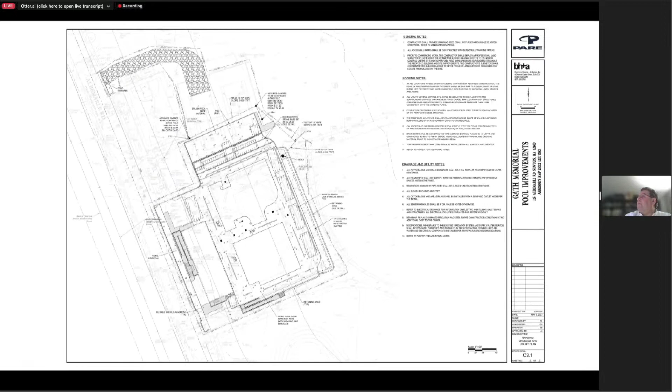This is basically the same drawing, a little bit different, without all the limits of work shown, just using a base drawing that we're working with.

One of the things we've been able to do at the request of a number of committees: in the area in front of the building, we are still adding the ramp and reworking the steps, but the large asphalt area in front of the building will now be a green space. They requested a lawn area here so that people waiting to go in or out of the pool, or just leaving, can have a lawn area.

We're placing bike racks on one end of the building to provide close access, and also providing bike storage for roughly 30 bicycles to accommodate anticipated capacity, as well as supporting bike storage and racks for the entire park. This entire area will be reconfigured with green space to soften the building up. We're also moving the garbage cans that sit next to the entrance over near the new areaway, which takes us to the basement levels.

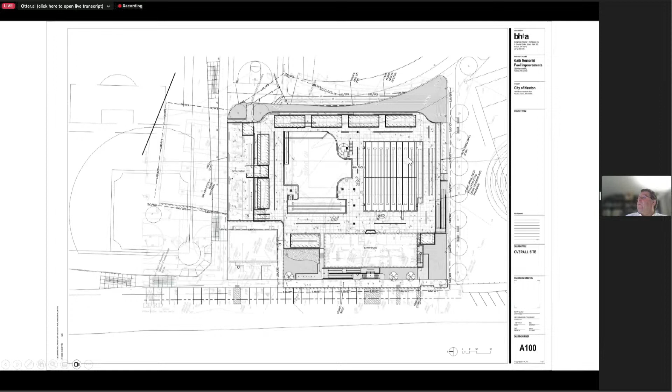We've continued to develop the decks and worked through a lot of the pool details, continuing to move forward. In the bathhouse, we have our ramp and the newly configured entrance. We've opened this up to provide better access, providing direct access from the lobby out to the pool decks, as well as having some lockers in here. That way, you no longer have to walk through the locker rooms or the office to get out to the pool.

The public has direct access. We have the gender neutral toilet and showering facility, and a gender neutral toilet directly off the lobby, in addition to the accessible facilities in both the men's and women's rooms. We've added doors to the women's shower stalls, and provided stalls with doors on the men's shower stalls. Right now it's just a wide open area.

The other big element we're doing here, instead of cleaning up the basement, is providing an areaway with flood-proof doors to get down to the lower level. Currently, all material is brought up to the deck and then dropped down. This provides direct access now for service and deliveries down into this area, as well as a second means of egress, which was lacking in the lower level.

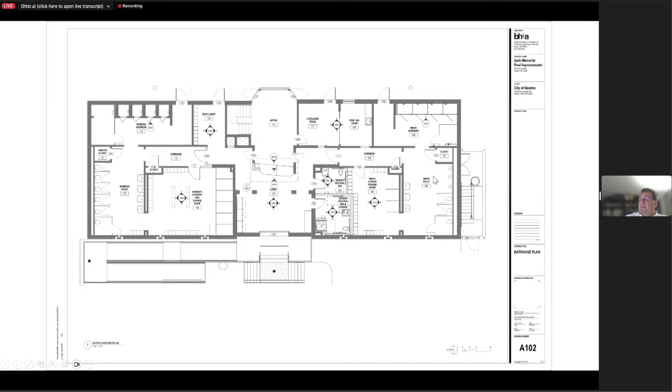The pools, again, we have our 8-lane lap pool, a large ramp, an accessible lift here, and shade structures around the perimeter. This is what we're calling the zero depth pool.

So from the deck you walk directly down to the water here, like a beach entrance. This will have railings to provide handicapped access, as well as an additional lift due to the perimeter of the pool. There are convenient stairs here for what we're calling water exercise, whether that's water walking or lap swimming. Programmatically, the city sees it used for resistance walking and exercise, and then there's a very generous recreational area along with a defined splashdown area for a new slide.

Other amenities here: we have rinse stations, outdoor showers with two heads, and foot showers as you exit the building, so you can rinse off without going back inside.

We have shade structures here set up for seating with some permanent benches behind. This can also be an ideal area for gear storage, or if people want to move a stroller or carriage out of the way, it's accessible to them.

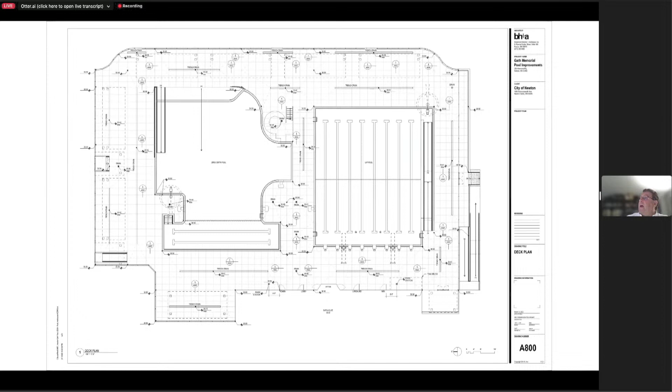Again, just more details. This is a larger detail of the pool, the 8 lanes. The lap pool is oriented slightly differently because I have to fit larger drawings onto smaller sheets.

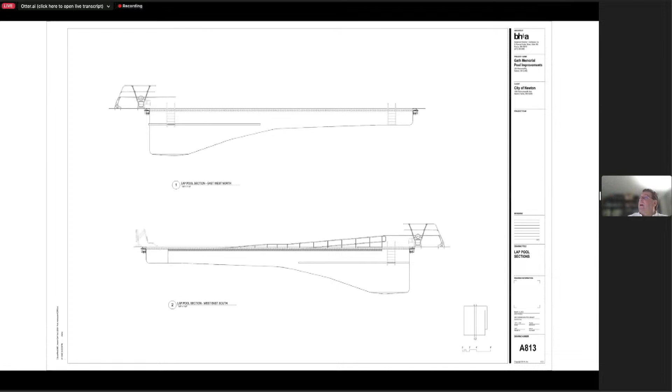The one thing I wanted to point out is that we are now showing the toe space, 2 feet off the bottom, which I wanted for structural reasons. So from roughly 5 feet of water all the way through the deep end of the pool, there's a 4-inch by 4-inch toe space, 4 feet below the water line. An individual can grab onto the gutter, put their toe in this space, and support themselves without just hanging off the side. That'll go on both sides of the pool, as well as beneath the racing lines along this area.

These will be tile racing lines for the 8 starting blocks here, and these are the positions for the return on the kick turn end of the swimming pool.

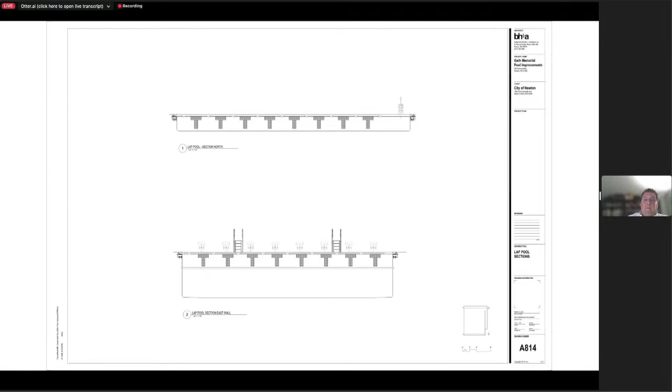One element we had to change: we lost the little step we had in the splash pad. We needed to change the grade of the spray deck to accommodate our flood storage capacity. The deck generally remains the same relative to layout and fixtures, fully and universally accessible for all. We've received feedback from Parks and Recreation, who received feedback from the Friends group, and we're incorporating changes where we can, being conscious of the activity, the age of users, and the water saving demands of that.

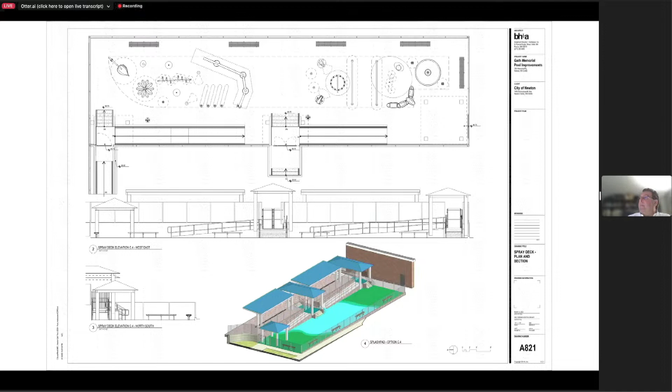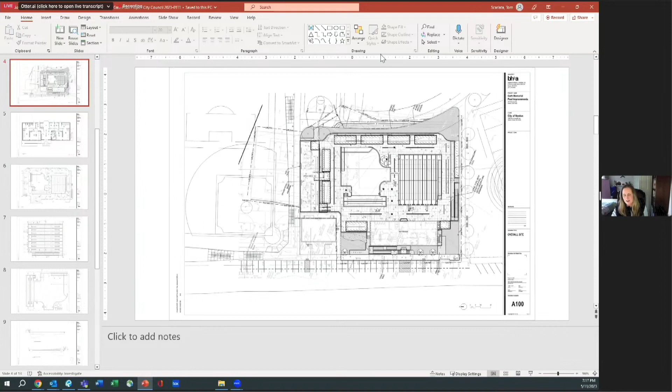Thank you very much, I'll make a motion for that presentation. Chair Leary, could I also add, we have our Friends of Albemarle group here watching tonight, and I wanted to mention them as well. They've been a great partner for this project, as well as the Albemarle Park project we've been working on alongside this one. Yes, they've been great partners. We've been hearing from them, and I know they've been integral to the project.

If you could, Tom, stop sharing your screen, I'd get a better view. No problem, there you go. Thank you very much, that way I can see a little bit better. So I'm going to take questions from the committee, and this is also a public hearing, so I will take public comment as well.

So I see Councillor Kelly has her hand up. Oh, thank you, Chair Leary. I can attest to the many, many meetings and changes and adaptations and tweaks and refinements this project has gone through, and I really appreciate that, so much like seeing this almost finished product. I have one question - I just happened to notice tonight, I hadn't before, that it looks like the men's shower stalls are much larger than the women's in the locker rooms. Is that true, or was that just a funny effect?

No, I think it's a funny effect on the drawing. There's a number of fixtures on the side that I think she drew just to the current spacing. We're actually adding an extra shower piece into it, so no, they're all roughly 3 by 3 - it's all equal, just tight and nippy. Thank you, Tom.

And I may have missed it in your talk tonight - these are really minor details, truly just questions. Did you show a place where there is stroller storage or parking, around the periphery or on the pool deck? Where was that again? Currently, where the wading pool is, that area tucks in next to the building, and that is staying as part of the pool deck. It's going to be lower so that the pool decks are flush with the floor of the bathhouse, so everything is accessible.

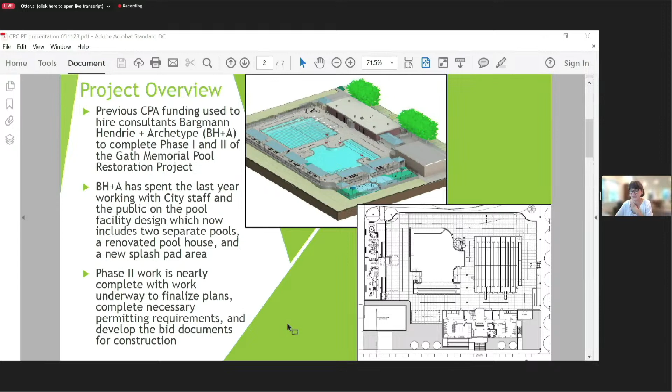I think the next slide—you've just heard that the pool now includes two separate pools, the new splash pad, the renovated bathhouse, all the mechanical equipment and more. In our meetings with the CPC, the committee asked a lot of questions about the design, about accessibility. Sustainability was a big issue for us, and also how the pool fit into other plans. Next slide.

Sorry about my dog. The CPC voted unanimously to recommend the funding for the project at $5.8 million. As you saw in the previous presentation, this is leveraged with ARPA funds, state earmark, and staff time. We recommend bonding the full amount over a span of 30 years, which we are assured is less than the expected lifespan of the pool.

Before we made this decision, we consulted with Jonathan Yeo, the CFO of the city, really trying to understand our options. We know the pool is more amenable to bonding than some aspects of the field renovations, which we've also been reviewing simultaneously. So we thought very carefully about the projects together to ensure we could be fiscally responsible, and we think the approach here is to bond the full amount.

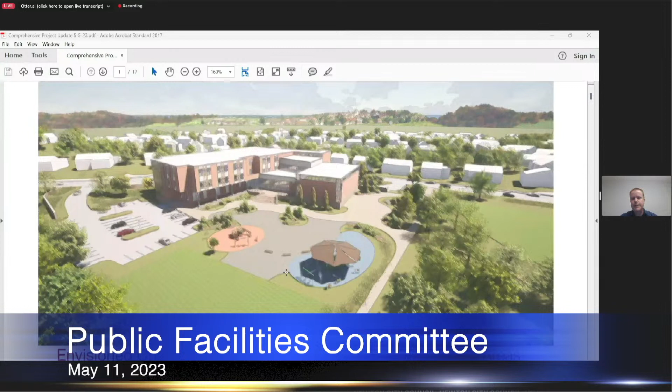So the Countryside School, this is in partnership with the Massachusetts School Building Authority, MSBA. Exciting project. We are knee-deep in the feasibility phase and currently working with the facilities subcommittee at MSBA to review the latest plans. The decision has been made to go new construction. The decision has been made to site the building in the northeast corner of the lot, the highest portion of the lot, for a couple of really good reasons. The site plan, although we're not seeking site plan approval anytime soon, is coming along quite nicely.

We've got a lot of good feedback from the design review committee and the community already. We are exploring the possibility of keeping the Countryside School students and staff in their facility on site while we construct this new building, because they physically don't interfere with one another. But we've got a lot of work left to do.

The staff, and certainly Principal Herlihy and the parents so far, have expressed strong support for that. But we need to prove it out. We need to make sure we can manage the parking during construction, manage dust and noise control, and manage access to the playgrounds and all of the construction phasing that comes with that. But from a high level, it looks pretty doable.

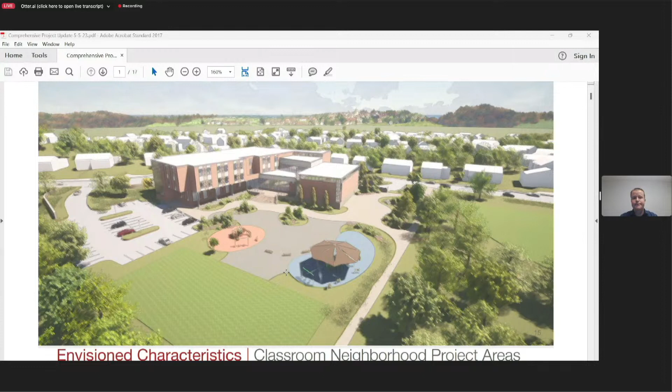But we've got more work to do. We need to work with a lot of stakeholders before we get too far down that road.

Overall, the educational program has been set. It looks great, there are no surprises here. It's going to be a school similar in size to the Angier School, with a design enrollment of 465. MSBA has agreed to that.

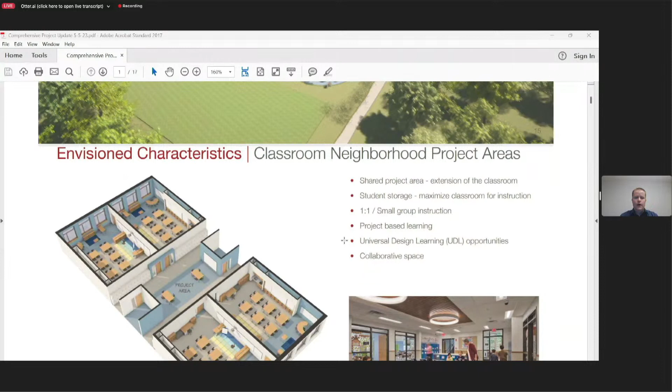What we're currently working with MSBA on is reviewing the design and siting of the building, and ultimately working towards a project funding agreement, which we're hoping to secure this summer. That will allow us to continue moving forward through the MSBA pipeline, move into schematic design, and start working towards site plan approval. We've got a lot of work to do before we get there, but that would be the next major milestone.

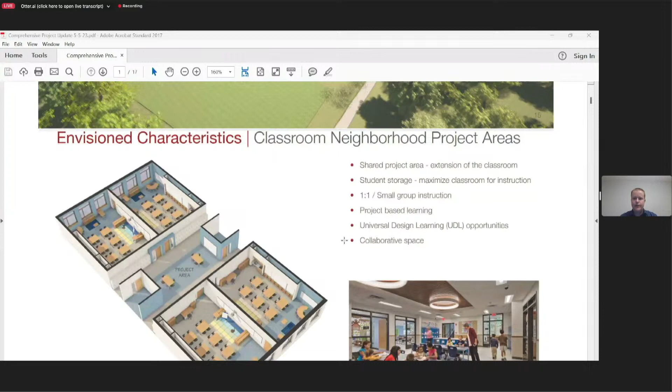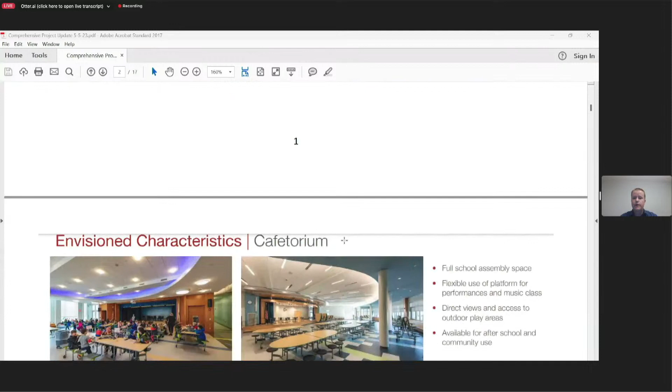We've had a lot of great community meetings for folks that have joined us. I know we have several councilors on the call tonight who are on our building committees. They've been well attended. I've now sent multiple batches of certified letters to the community — that was one of our lessons learned, to engage people with certified mailings early on.

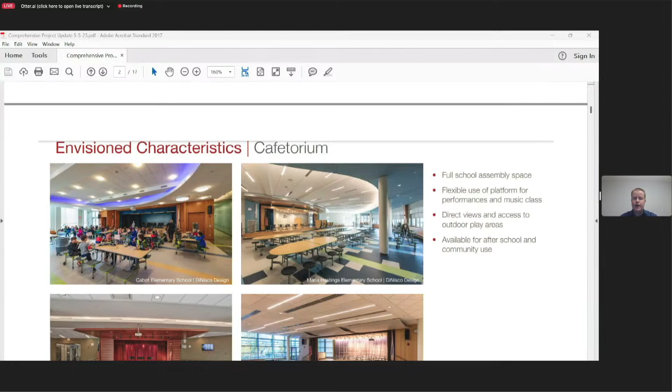And then again, obviously as required for site plan approval. But I did another round of these after the override, because the override got a lot of people's attention, and I wanted to make sure we took advantage of that so folks had an opportunity to come and get engaged on the project.

Right now we have about 200 people who actively follow the Countryside School project and come to our meetings, so we're in good shape there.

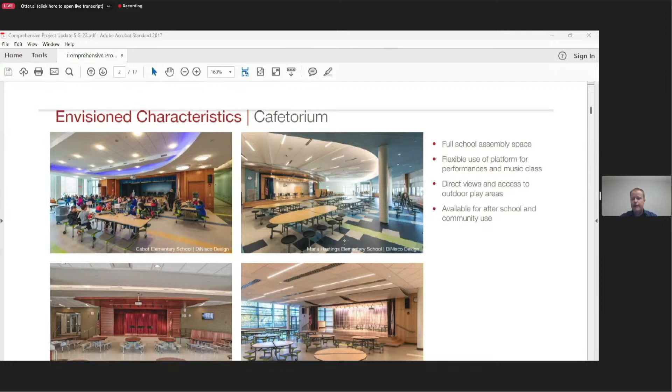What I have found is that because we have so much going on, a lot of people are watching these meetings after the fact and then emailing with questions or comments. It allows them to do it at their leisure, and they can fast forward through the parts of the meeting they may not be interested in.

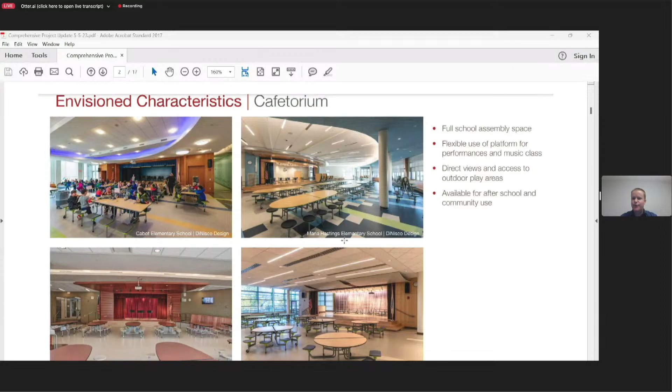We've already had a couple visioning sessions with the staff. We've stayed very connected with the Countryside School staff and Beth. They've been awesome in helping to set the stage — no pun intended, as we look at stages — for the future of the Countryside School. Lots of great ideas coming from them.

We had our first meeting with the Conservation Commission. That went extremely well. Obviously we have a lot of work to do because they're right in our backyard, literally.

We gave an update to the Public Facilities Committee, and that went extremely well additionally. And our Countryside School Building Committee voted unanimously to submit the preferred schematic report to MSBA.

All of those files are on our project webpage. We've posted everything. I try to send these out to the project listserv following every meeting so that people, whether they made the meeting or not, have access to all of the materials with a brief explanation of each meeting.

That is the high level on the Countryside School project. We are still on track to break ground in 2025 and complete the project in 2027. It's still very early, so there might be opportunities to accelerate that, but time will tell.

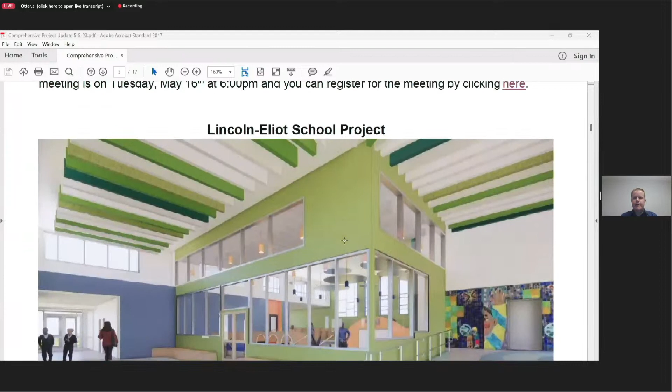The Lincoln-Eliot School project — we are now in the final phase. We're in construction documents, and we're working hard with our design review committee to move this project along. Our program is extremely well established at this point.

This is a view of the lobby coming in from the Jackson Road side of the building. You're looking into the library there, starting to play around with the introduction of some vibrant colors and developing our color pattern for the school, working with the staff on this as well, Maura Morse and her team.

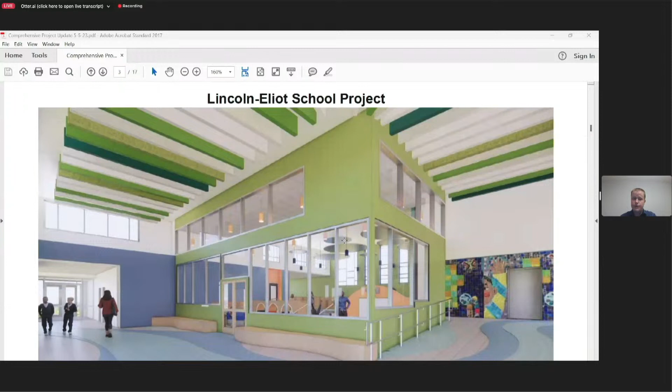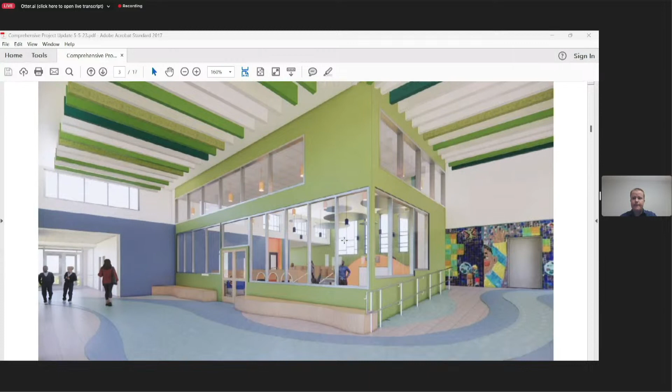We're using a lot of 3D modeling to fly through and help make sure we're nailing down sight lines, form, and function. The staff and the community have been extremely excited about the project, especially as of late when it really starts to feel real.

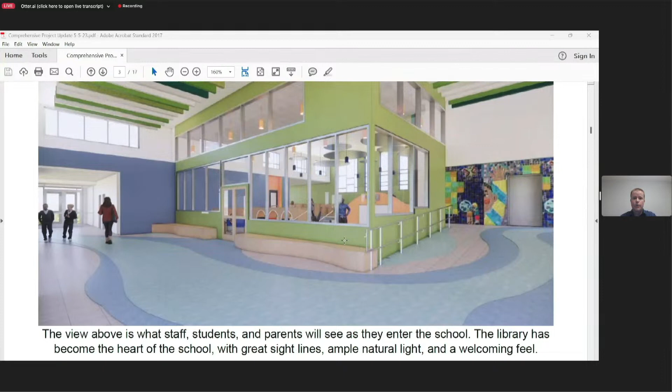We are looking to bid this project towards the end of the summer. We're going to start construction this fall. We are still on track to be completed with the project in the summer of 2025.

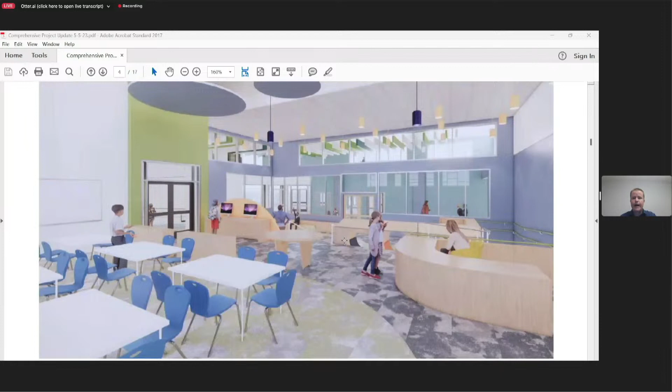We're also starting to work with the design review committee. As you can see, we're looking at a lot of different options on the addition, looking at how we break up the massing.

For folks that have been around and been through these a few times, the gym is always the big addition, and that's the area we spend a lot of time trying to make sure we're scaling down as much as possible.

We have a lot of direct abutters who are directly engaged in this project frequently, which is awesome. So we've been able to incorporate a lot of their suggestions as we move forward.

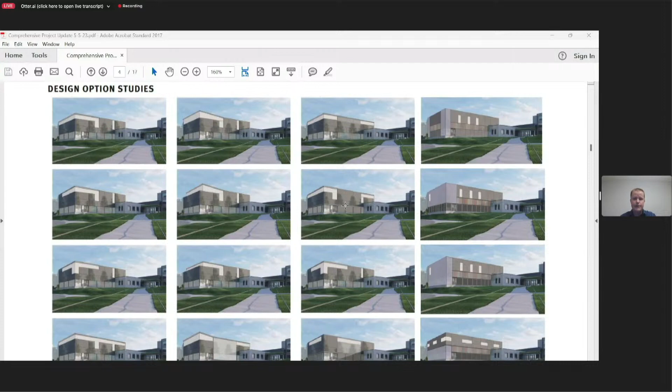So that's the Lincoln Eliot project. We're moving right along and in great shape over there.

Our next one is in, I think, three weeks. So we'll be working with Mark and his team over there. Extremely excited to be able to re-engage with them.

This is a very passionate teacher base, so it's going to be really cool to be able to round things out with a visioning session and really get cranking again on feasibility.

At the same time, we just presented the space program, the space summary, which identifies the design enrollment of 396 to 414.

That number may sound familiar for our Ward 1 councilors - that is the same design enrollment that we used for the Lincoln Eliot School project. The Franklin School enrollment, current enrollment, and certainly the projected enrollment suggest that is a very reasonable number.

But just like Lincoln Eliot, in the design process, we will include in the design a future siting of additional classrooms should they be needed. All core spaces will be sized to support a full 465 student population so that the building can grow should it need to. So the school building committee endorsed that. We're in good shape there.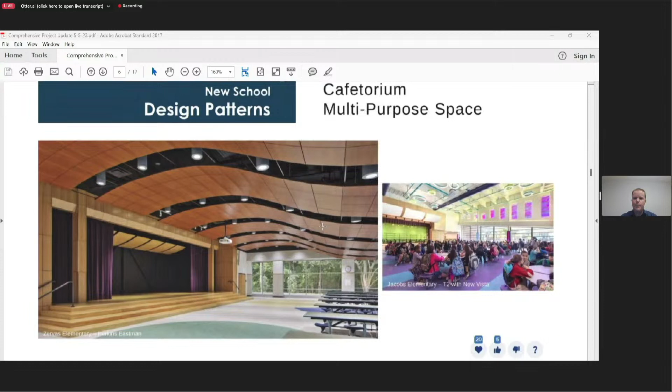Same thing - we will start to evaluate addition, renovation, and new construction options, varying site test fits, and we will approach it the same way with our criteria and our matrix that you see so often. We'll be working with the community to weigh the opportunities and challenges associated with each of those.

Ultimately, working towards a decision, I would say, on that front sometime this fall, and then working towards site plan approval thereafter.

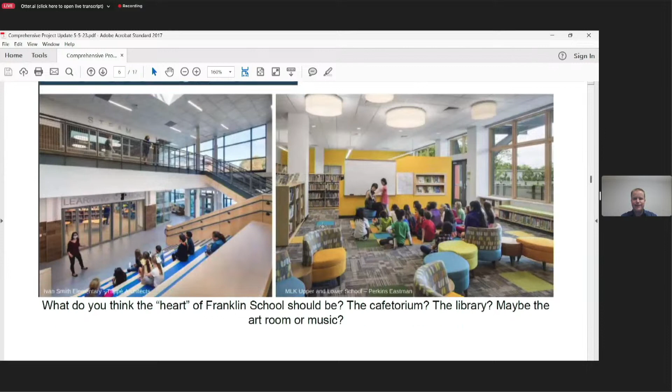These are some of the images that we use when we're working on visioning with the staff, but they're, of course, exciting to get people thinking about what could be there.

So we've covered all of this. I'd like to thank HMFH Architects, our design team. We are also in the process of working with the designer selection committee to interview and onboard our owner's project manager and ultimately select them.

We hope to have them on board by the end of June, which will time out perfectly, meaning the school committee gets the design enrollment and space program established, we get our OPM on board, it all hits at the same time, and then we roll right into the summer and get to work.

We are still anticipating that this project would be able to start in 2025 and complete in 2027. That is assuming, as we've spoken about before, that Countryside doesn't need the swing space and Franklin doesn't need the swing space at the same time.

As I mentioned before, it looks like there's an opportunity to do Countryside on site. If that's the case, Franklin can use the swing space, should it be an add reno or new construction. Or if Countryside needs the swing space and Franklin does new construction in a different location on the site, it could also stay in its current facility while we build a new facility.

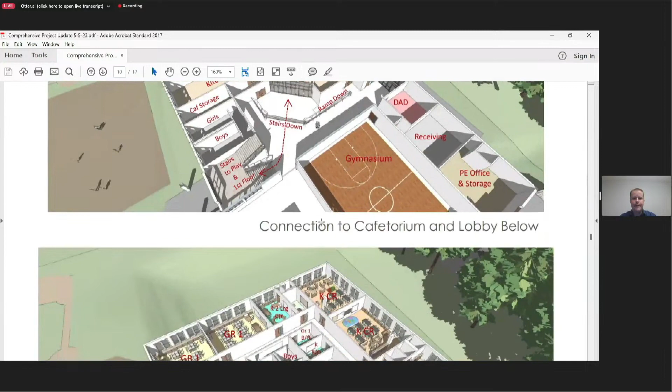The Newton Center for Active Living project has a very similar timeline to the Lincoln-Eliot School project. We are now in construction documents, final phase, working on fixtures, furniture, furnishings, and equipment. We're starting to look at color patterns because this looks a little sterile right now.

So we'll be introducing all of our paint colors and finish colors in the coming weeks. We are pre-qualifying contractors, just to give you a sense of how close we are. Big picture, I think we're going to be looking to begin construction probably in September. We'll be bidding over the summer and then starting work in September.

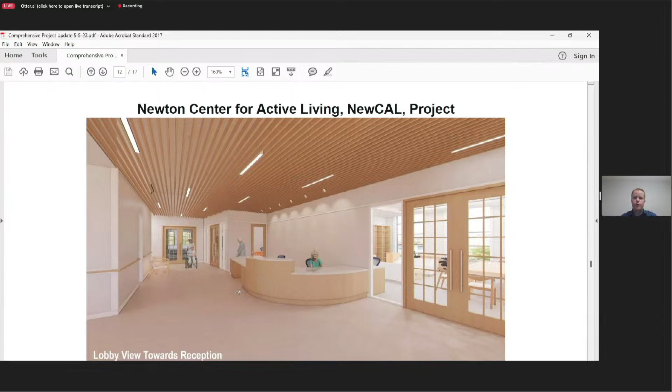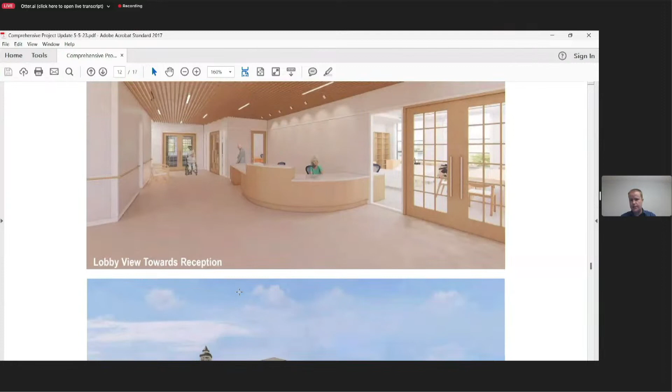Our goal is to finish in the summer or fall of 2024. The inside of the building—the floor plans have not changed, but we've continued to refine elements. And the outside of the building is almost completely unchanged, so we're in good shape there.

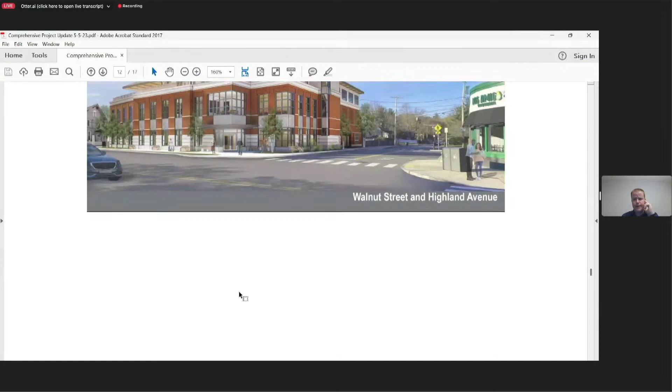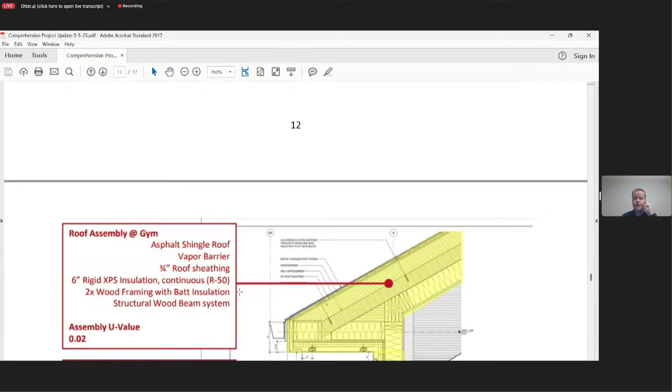The design review committee just last night met to review the final, or 90%, construction documents, and they voted to allow the project to go out to bid, confirming it meets the program and is ready to do so, obviously with comments, which is pretty typical. That is our last major hurdle before we put the project out to bid. A huge shout out to the design review committee because we've been keeping them extremely busy.

The Gath Pool project should be fresh in your minds, but it's been an exciting one. I think the design review committee really liked working on this too. It's a different project—quite frankly we do a lot of schools lately, so it was neat to do something a little different. This really is a fun project, and I'm really looking forward to what this is going to do for the community.

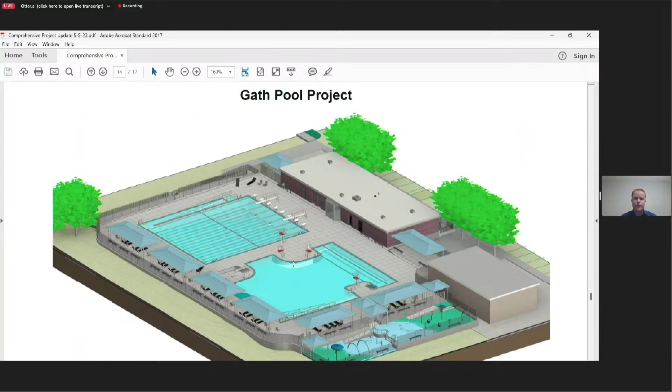A huge thank you to BH+A, they've done yeoman's work on this. Tom Scarlotta, for folks that don't know him, is a humble guy, but he's the premier pool designer in the Northeast. This is what he does—he designs pools, it's basically all he does, so he knows the stuff extremely well.

And the Ward and Underwood initiative—we just kicked this off as well. This initiative is being led by Newton Public Schools, but the Public Buildings Department is assisting from a process standpoint. We used the Designer Selection Committee to evaluate proposals and ultimately selected Perkins Eastman as a consultant to support Newton Public Schools for their enrollment and facility study.

Perkins Eastman may sound familiar—they are the designer that did the Zervas School. They have a great track record on projects like this and a great temperament for it as well, so we're really looking forward to that. We've done a few meetings already, and all of that information is posted on the Newton Public Schools website. This is an exciting project to help determine the future for the Ward and Underwood schools, two of our oldest and smallest schools in the city.